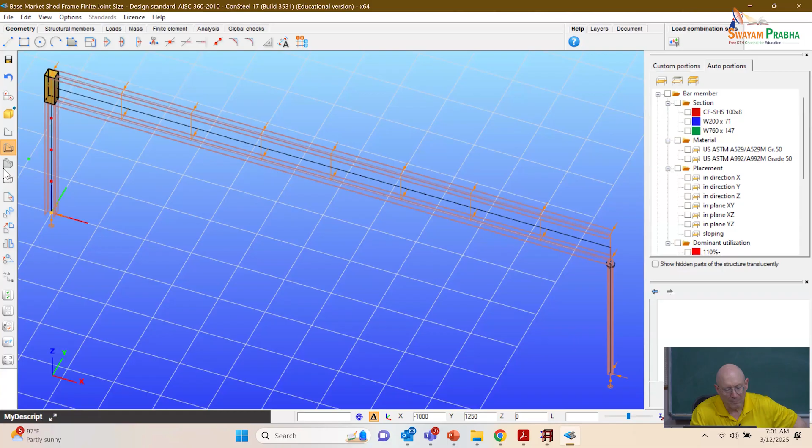I'm going to turn these off. Okay, so we've got that view of our frame here. It looks a lot like the L frame that we did before, but this is a sway frame now. We've got the out of plane bracing similar to the L frame. They are top and bottom flanges on the roof girder. We've got simply supported boundary conditions in plane but resisting twist there at the base.

And now in the market shed frame we have an HSS column here on this end that's supporting the so-called right end of the roof girder.

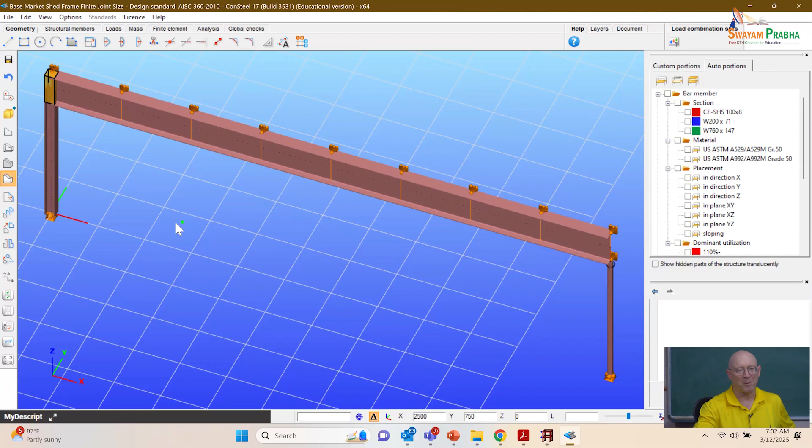Now remember when we did our model of the market shed frame yesterday, we had a pin. Now a few subtle things there at the top and bottom. The pin was basically at the location of the reference axis or centroidal axis of the roof girder in what we modeled in the analysis model I showed you yesterday, which is kind of a typical approximation that we often would use in engineering design.

So if I look at this one, let me go to that. I like that representation better. Here, kind of similar things. We've got the frame wizard model of the panel zone area there on the left. But what I've done here is in modeling the HSS column, I'm only modeling that column to the bottom of the roof girder.

And in that column, let me turn off the portions menu there, and let me pull up object property, that's good. So I'm going to select that HSS column so we can inspect the object properties there. Notice I have a release start point. That's the start, at the bottom. That's continuous, but I've got supports there that are basically pin supports at the bottom.

But at the top, I've now changed that from continuous to XX, YY, ZZ, W. That means I'm releasing all rotation continuity between the top of the HSS section and the bottom of the roof girder. Now maybe that's overdoing it a little bit. Possibly the ZZ should be continuous, and then we say, oh yeah, we're going to model the connection to the bottom of the roof girder as a pin.

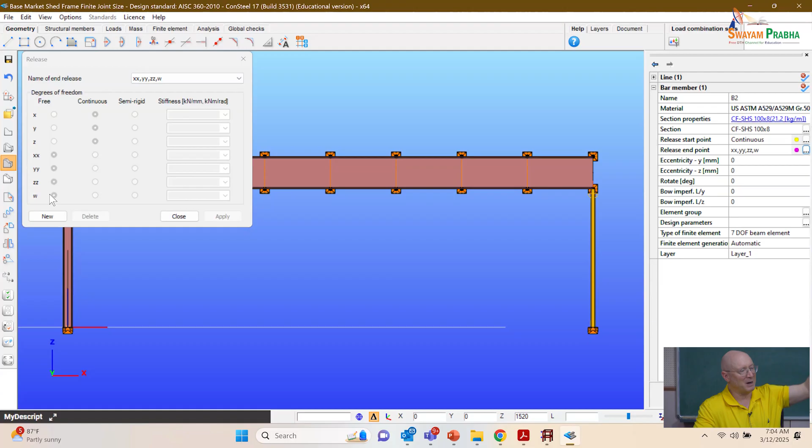Okay, now how did I get that when I modeled the frame? Similar to what we worked through when we did the L frame, but here, if I was putting in a column and I wanted that end release, then instead of continuous, I would have changed that here. Basically, I'd say I want to release those rotations and the warping continuity at the end. Now I got my column length, what reference axis do I want, how many elements, and I put the column in only with the length to the bottom of the roof girder.

Okay, so now there's another modeling feature that's available in Consteel that's very useful if you're doing something like this. At this point, if that's all I did, then Consteel would not recognize that the column is connected to the roof girder. So I've got to do something to connect it.

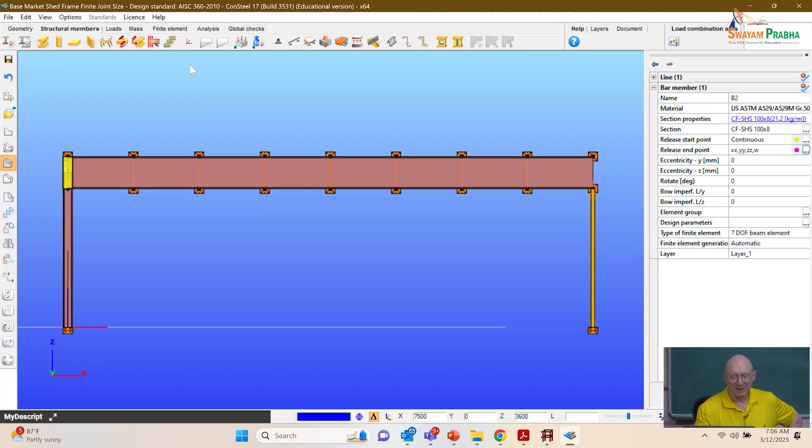If I go back to the line view, I'll highlight to show what's going on with that. So if I click right in here between that reference axis of the roof girder and the column, I think I got a point support there also. I'm going to turn that off. I've got what Consteel is calling a connection element.

How did I do that? If I come in and go to this option of a link element, I need to create a link between the reference axis of the right-hand end of my beam and the top of that HSS column.

So if I clicked on that and brought it up, I could basically say I want both of those ends to be continuous, because I'm going to model the release in the member that I'm connecting to. I just click at the reference axis of the beam, click at the top of the column. I've now got those connected by a rigid link.

Now, what's the significance of that? The results don't really change all that much by this further modeling detail, but they change some. Let's look at a three-dimensional view of the structure where we've got essentially a three-dimensional rendering of all the members, so we can understand what's going on a bit better.

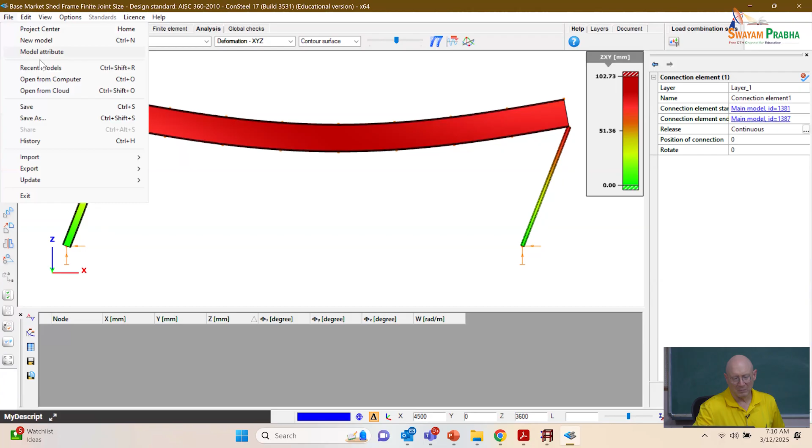Let me bring up a model that doesn't have this, and that might help you in thinking through it. So this is a model that's more like what we were working with yesterday. Let me get a front view of it. So when I analyze things here, it's working that way, right?

So what's different here, and would cause larger displacements at the top of the HSS column in the other model? So here's what I've got in this case. And if I go to the other model, get that out of the way, so now we've got this. Do you see it?

You want me to just tell you? Load is causing an extra moment because it's such a... Okay, all right. Like a P-delta moment? Yeah, yeah. So notice by doing this, now my leaning column, this HSS column, is shorter, right?

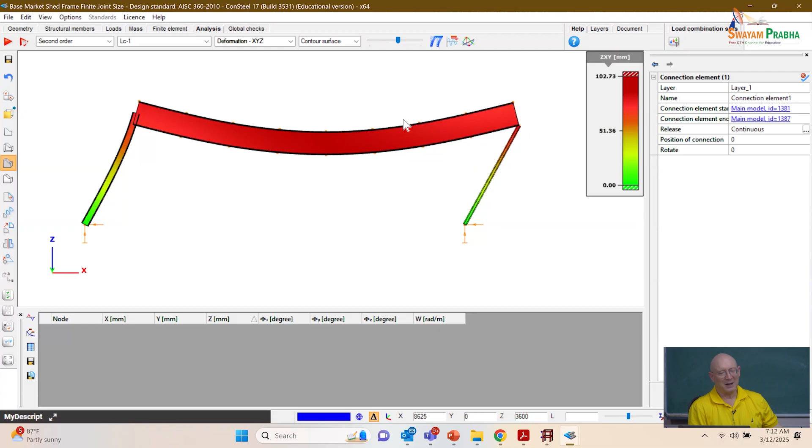The shorter I make that column with the same delta, the bigger the P-large-delta effect. Same delta, shorter length, bigger P-delta effect, right? So that's coming in. Now what's the other thing? Look at what's happening in terms of the lateral deflection of the centerline of the roof girder versus the lateral deflection at the bottom of the roof girder.

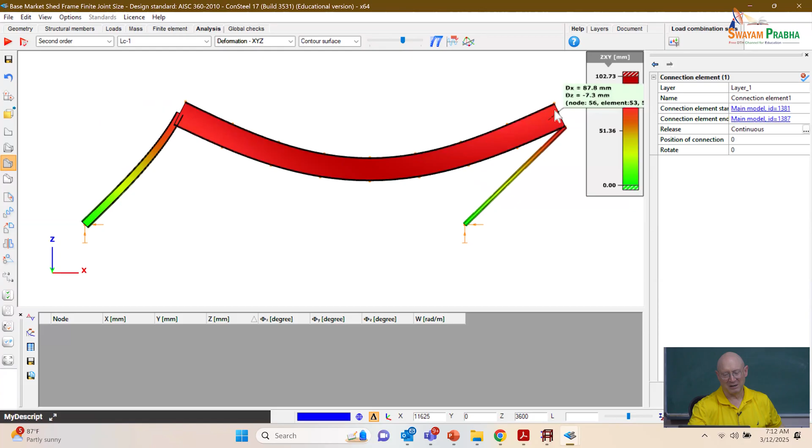If I'm connected to the bottom of the roof girder here, it's deflecting further, because I've got a major axis bending rotation that's counterclockwise in the roof girder. If I'm connecting to the bottom, then that point's displaced laterally further than the reference axis. So both of those things are giving larger displacement at the top of the HSS column than that other model. You might say, does that make a big difference? It doesn't make too big of a difference, but it is a difference.

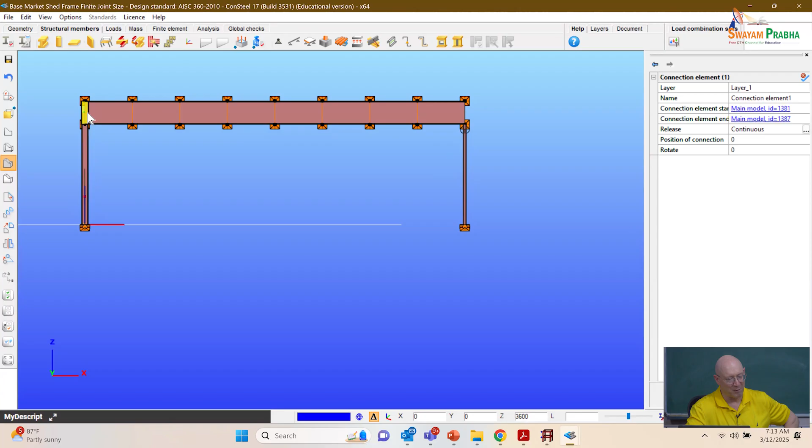Now, another aspect here - Consteel, if we went to its design capabilities, would handle things this way once we've modeled that joint. So if I go back here, I'm modeling this panel zone with the joint wizard. In sizing the wide flange column, or checking it here on the left, it would basically say that member stops at the bottom of the girder - I'm not going to model member length all the way to that center line. We've got a big beam adjacent to the center line over a finite length there of the panel zone.

So that's really a more realistic assessment in terms of sizing the column. I noticed in the Indian IS 800 code, it basically said you should always design the member center line to center line. But here, this would be an argument that in some contexts it would be more appropriate to consider that member goes from the base plate to the bottom of the roof girder. Same thing for the HSS section over here - it's a little bit shorter.

So that may - here we're just modeling in this representation, we're just modeling the behavior. That's working just as a pin and strut - we're not generating any moment in that HSS section. Got a nice, perfect spherical bearing connecting the top of the column to the bottom of the roof girder.

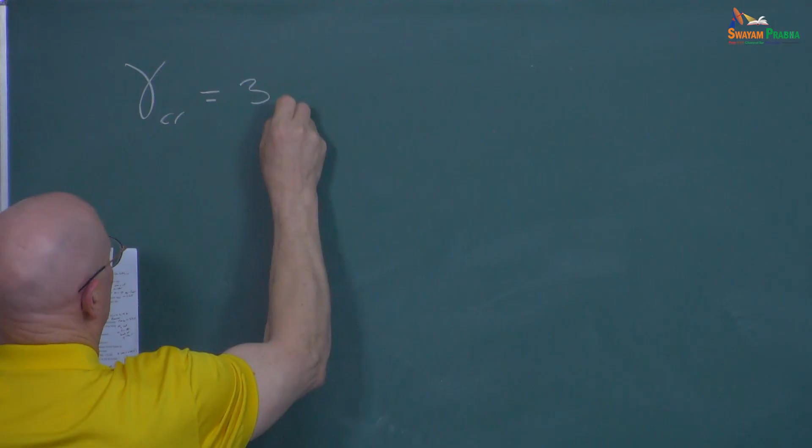And if we do the checks here on this, we basically find that things are more than adequate. So here's where I want to use the board a little bit. Our gamma critical for this case is 3.74. So that's the elastic buckling result. Let's actually look at that.

So if I go to buckling analysis - oh, what's that? Oh, the HSS section is buckling. Okay, that's important for the HSS section. It's not important for the frame design though. If I set this to a perspective mode, let's look at the second mode. Oh, it's buckling out of plane - it's a square HSS section, so yeah.

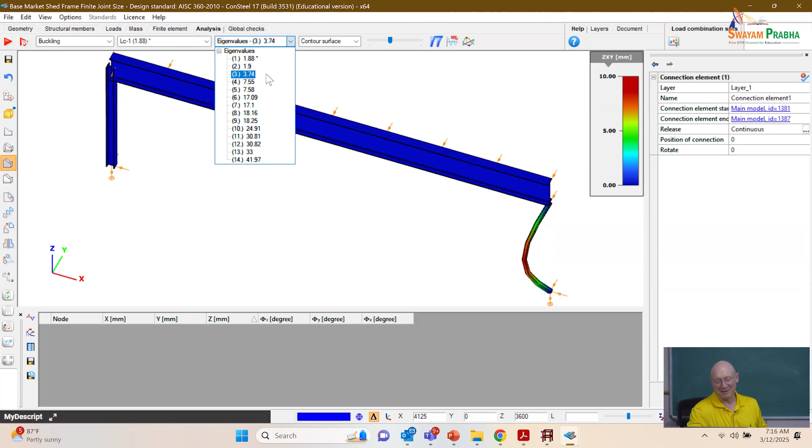Oh, this is the one I want for the frame. It's a front view here. Oops, I don't want that buckling mode. So 3.74 - this is my buckling mode for this case. Clearly that's a side sway buckling mode.

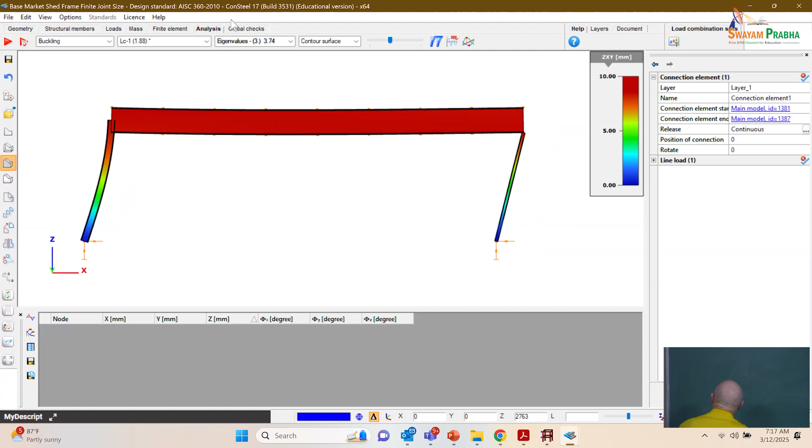I'll just say very broadly, so the axial force in the HSS section here is equal to 370 kilonewtons, and the moment in the W section at the top - this is at the bottom of the girder - is 111 kilonewton meters.

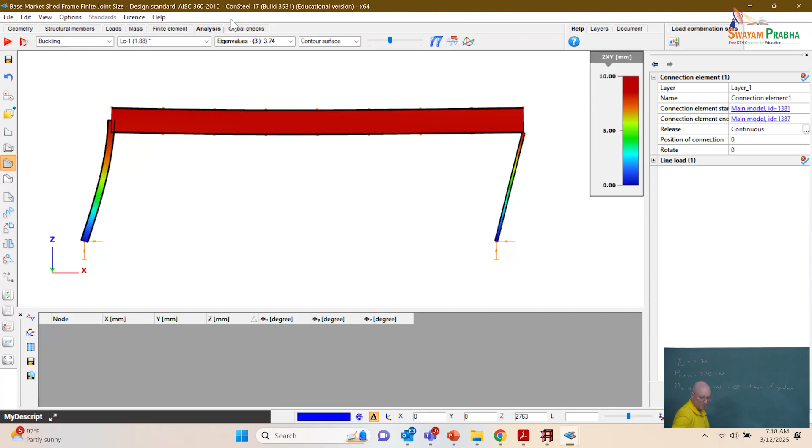Again, if we look at second order analysis results here for this, we can go to internal forces and go to MX. So what I'm referring to here is, clearly the moment is dominated a lot by moment bending - the big moments are actually in the roof girder. I can turn on the portion manager and use the automatic portions here to basically say I'm not interested in the moment in the roof girder - let me just look at what's going on in the column and in the HSS section.

Well, no, there's no bending in the HSS section here - it's pin-pin. And at the top of, or the bottom of the roof girder, there's your 111.

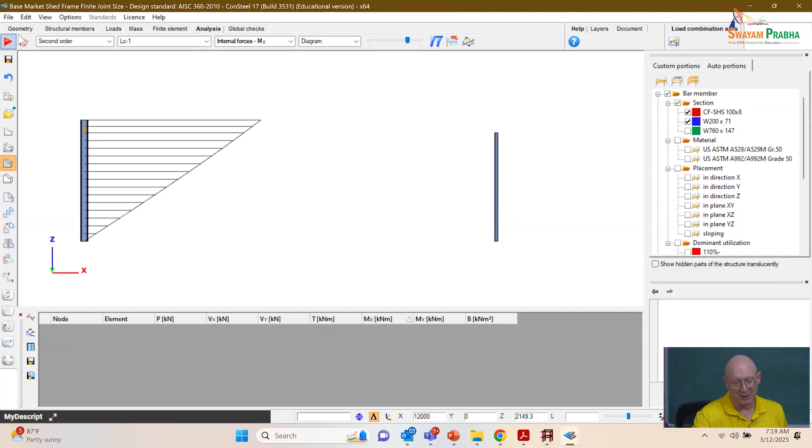All right, so that's a model that often we would use for design. But now let's look at another representation where it's a continuous market shed frame with finite joint size. So if you pull that one up - okay, so here's the frame, looks pretty similar to what we just did.

If I look at the front view of it, there's my front view, but I've now changed this. I basically went in and said, on this column, we'll turn off the portion view, and I've now changed the release endpoint to continuous. So I'm saying, I've got an end plate connection of that HSS section to the bottom of the girder - I think maybe that's closer to a continuous detail than a pinned one. So that's what I'm thinking for my idealization.

Let's run the analysis. So if you run the analysis that we're set up here, clearly that HSS section - let's do second order.

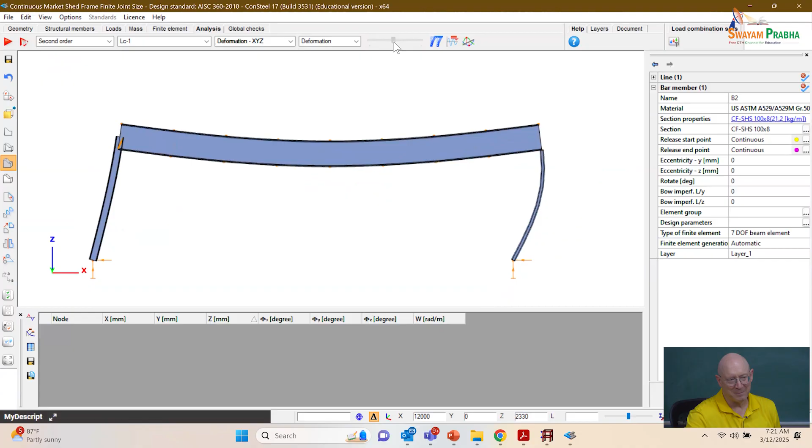So if we look at the deflections here, that HSS section is kind of getting beat up by the frame a bit, right? It needs to bend with the major axis bending rotation at the end of the roof girder.

So it's bending way out there. And if we assess what we've got with this by going to click on the deformation XYZ, go down to internal forces, and we'll plot the bending moment MX.

Let me turn the portion manager back on, so view portion manager, and we'll just do the HSS column and the other column. So now if we scale those moment diagrams,

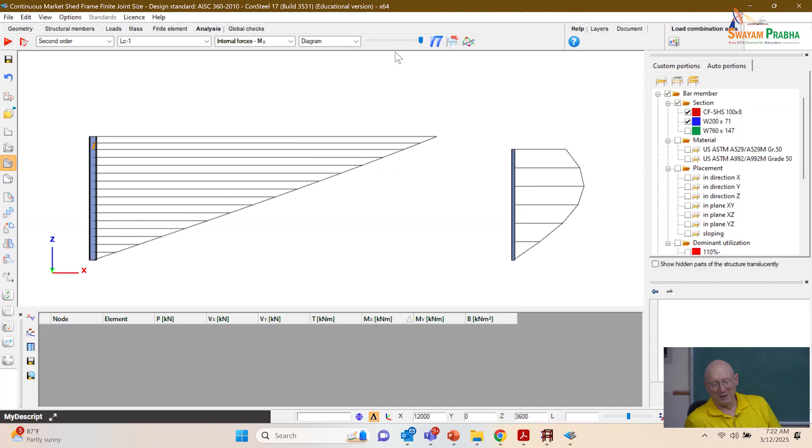clearly that HSS column has got a lot of P-small delta effect going on, right? Even though this is a sway frame. So this is what I was mentioning yesterday when I said, okay, well, sometimes you can add material or you can add continuity and you can make a structure weaker.

So let's look at what we've got for the buckling load on this. So we'll go back to the full frame, and we'll tone down the exaggerated displacement there a bit. So it's buckling like so. Remember, the buckling load we had with the previous model was 3.74.

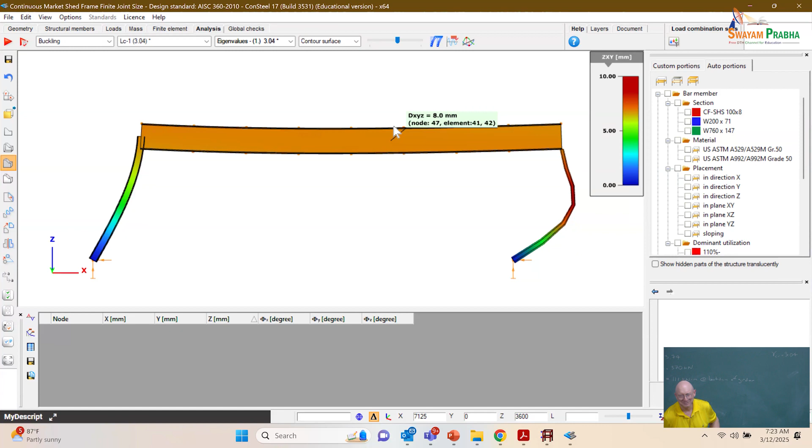This is now gamma critical equal to, what, 3.04? What happened? We added continuity, the buckling load went down. Or at least the buckling mode involving side sway went down. We had a lower buckling mode on the HSS section before.

So is this side sway buckling, or is it non-sway buckling? Or is it neither?

We've basically got a problem, and this is what LeMessurier, when he was doing that inequality I showed you with the calculation of the K factor, he would put a lower limit on the K factor because if he was looking at frames like this, that stiffness-based model that we use, that's just a side sway stiffness model, stops working so well when we get to a frame that's like this.

Let's be careful. Yeah, so it's kind of a hybrid buckling mode involving non-sway buckling of the HSS column, which has some partial restraint of side sway from the rest of the frame, but the rest of the frame is undergoing some sideways sway in this buckling mode.

Right? And so the first thing I'd like to ask here is a question. I didn't write out a handout for this, but how many elements do we need to make sure we've got a good model of this HSS column?

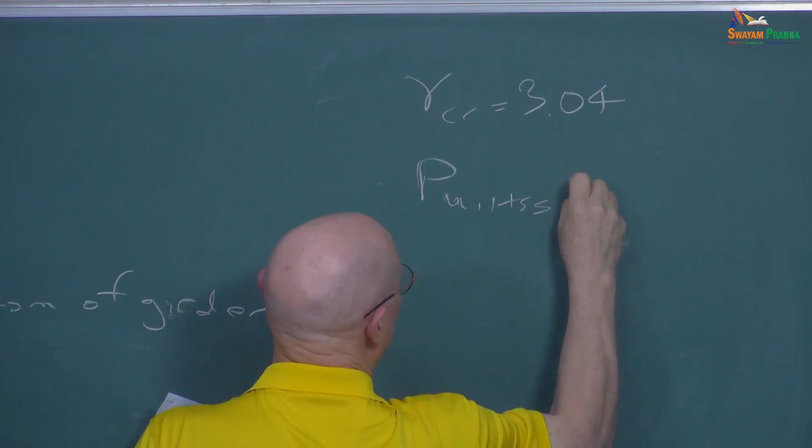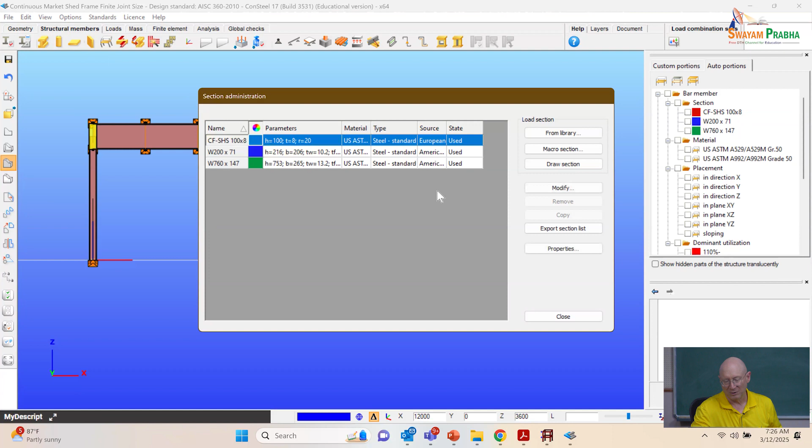And if we need to look up, well, what's the moment of inertia of that HSS section that we use? We can come back here to the section administration. We can click on our HSS section here, modify. Yeah, moment of inertia is 3.616 times 10 to the 6th millimeters to the 4th.

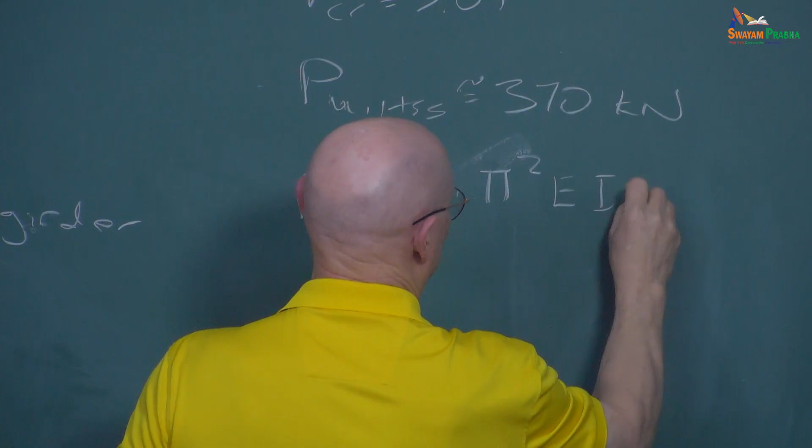And so if we do a PEL there for that buckling of the HSS section in plane, so I'll call that X. That's equal to pi squared EI of the HSS divided by that L squared, which was, I think, I'll do L minus the depth d over 2 of the roof girder squared. So if I do that, I get 688 kilonewtons for that.

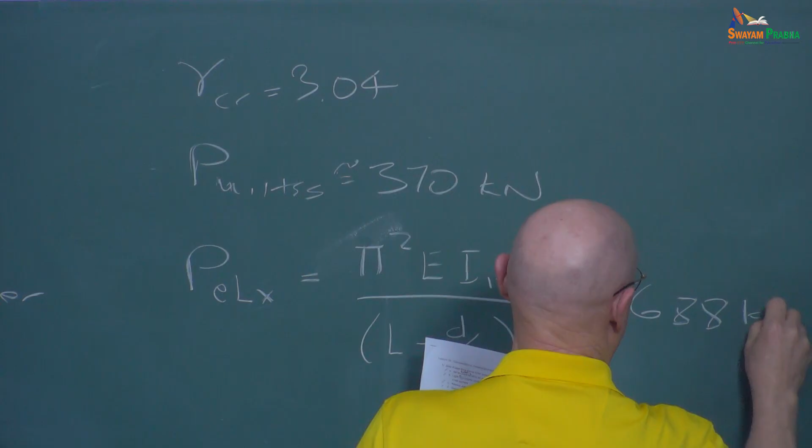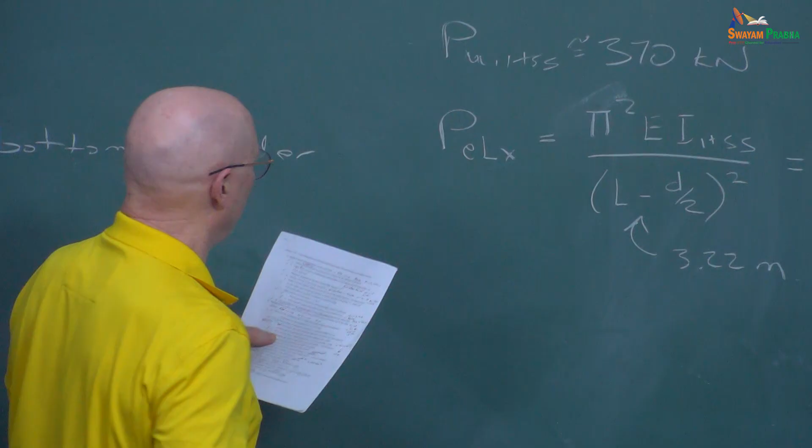Okay, so for this we get, it's 3.6 meters from base to the center line of the roof girder. So this is 3.22 meters here for L minus D over 2. And so the PU over PE script L here is 0.54.

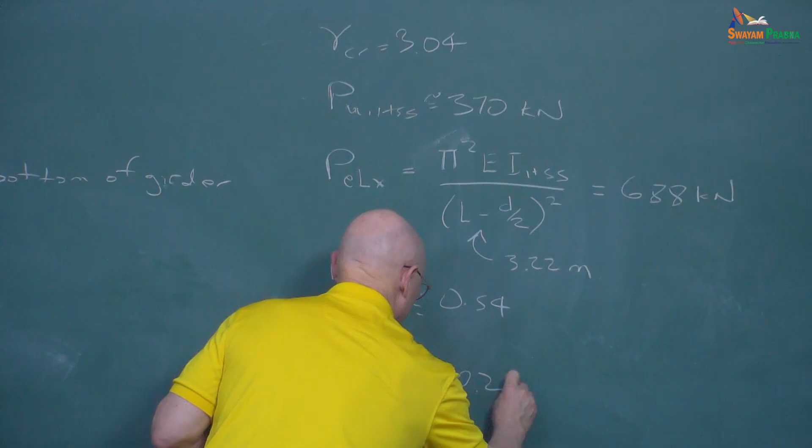How many elements do you need if you want PU over PE script L less or equal to 0.02? How many elements?

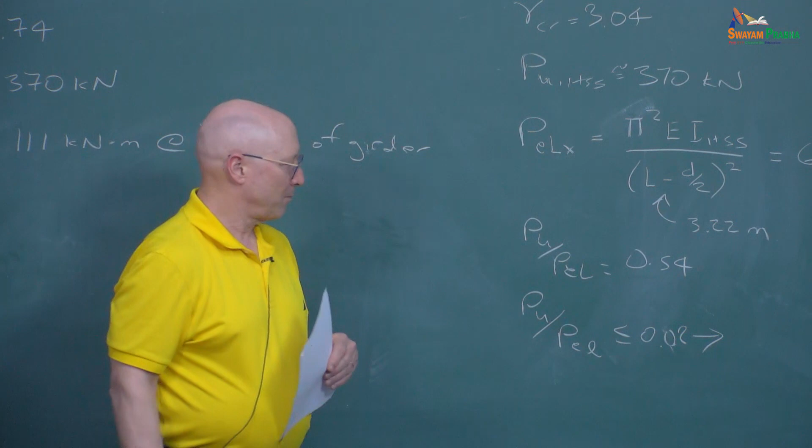So that's kind of the basic rule, applying the basic rule of thumb that I've been discussing there. And if we check that column, what did we use?

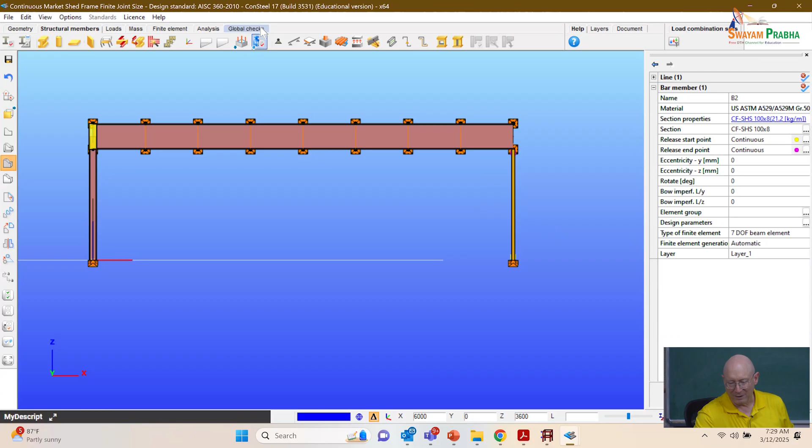Let's see, I have automatic... if we look here, this basically shows it: 1, 2, 3, 4, 5, 6. That's what you'll see Consteel use - often 6 elements between unbraced lengths or between brace points.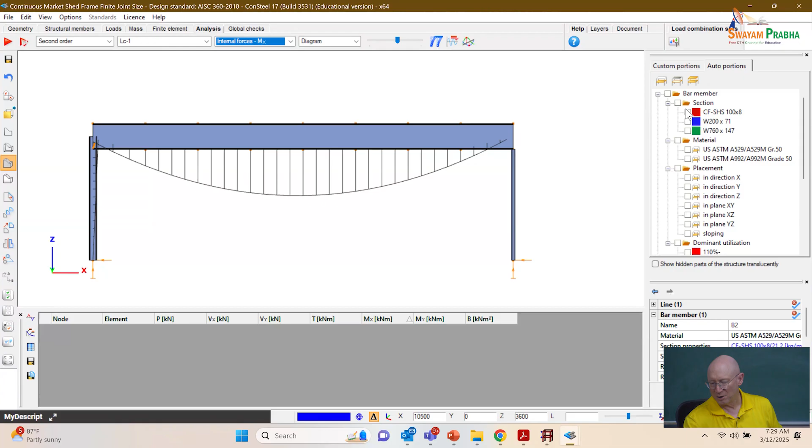Okay, so that looks like that's going to work pretty good. Without doing all that, you could simply say, let's look at the moment diagram we get from the analysis - does it look like a reasonable representation? We're doing a bilinear representation of the moment diagram. Is that a pretty good fit to you? It looks pretty good. It's piecewise linear, but it looks like a pretty good fit to what is really happening.

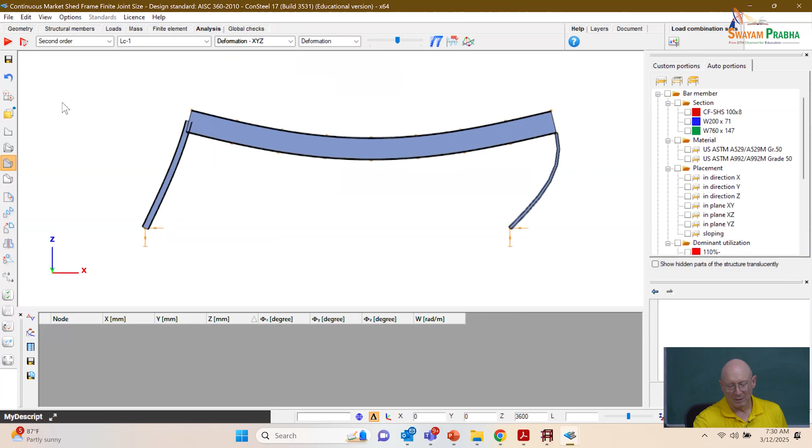All right, so the academic question of the day: if we come here, and let's come back to where we're drawing the deflections, we can look at it with a perspective view if you wish.

Should the continuity help or hurt the HSS column here? So we can see already that the gamma critical was decreased. What's the buckling mode? We can see there's a lot of non-sway, or basically non-sway bending, we'll call it, in the HSS section.

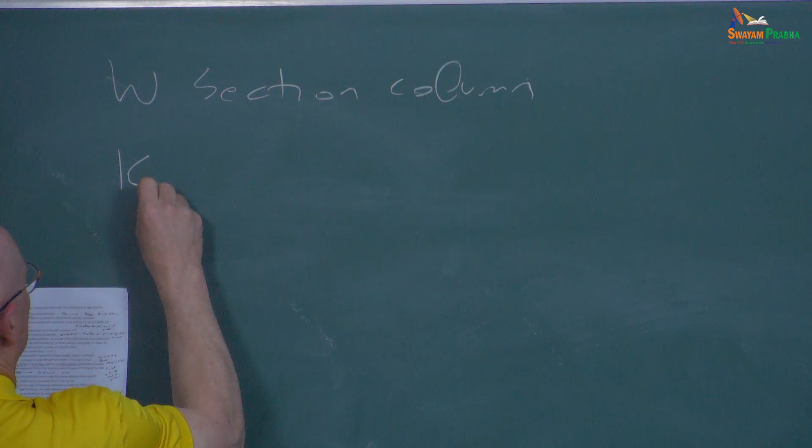Now if we do a check of the wide flange section there, without writing all the numbers out, we'll get for the wide flange column - the left-hand column - the effective length factor Kx is 3.29. This is based on L equals 3.6.

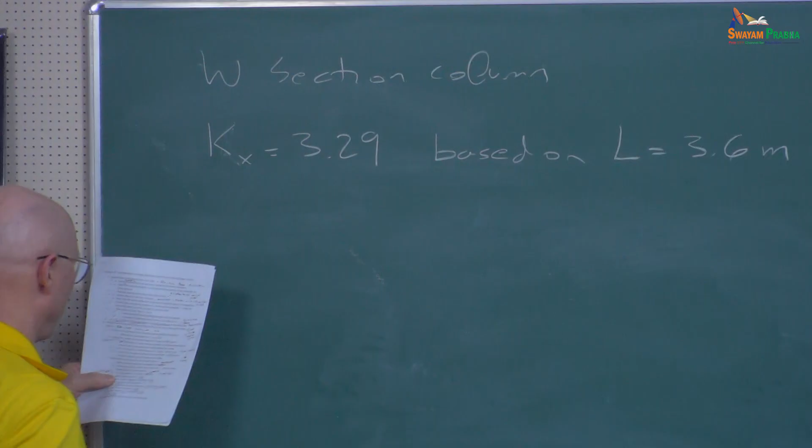You could say, why didn't we use it to the bottom of the column? Okay, if we did, we'd still get the same KL, because the P critical X here is the same number - that's the fundamental value, that's 1081 kilonewtons.

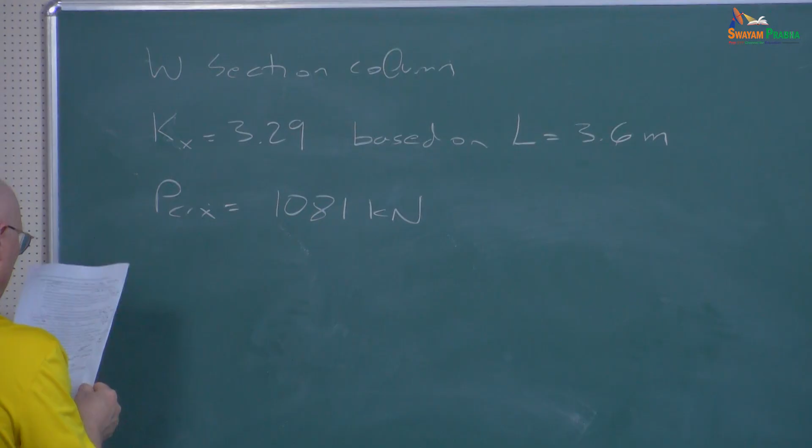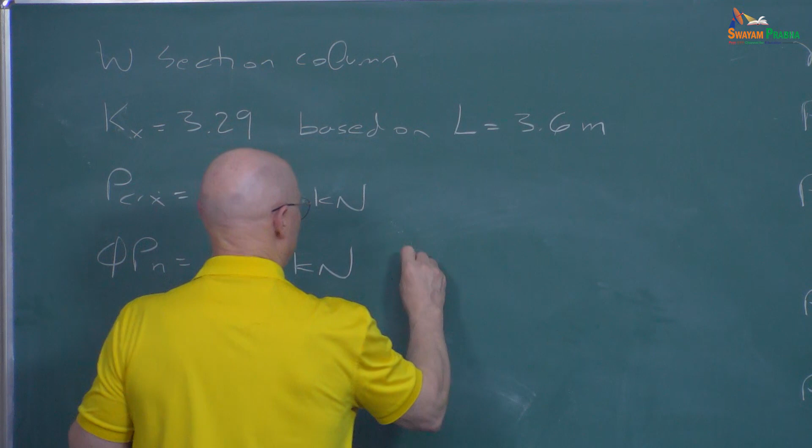And so if we use this with the AISC column curve formula, then we get a phi Pn equal to 838 kilonewtons, and a Pu over phi Pn equal to 0.418.

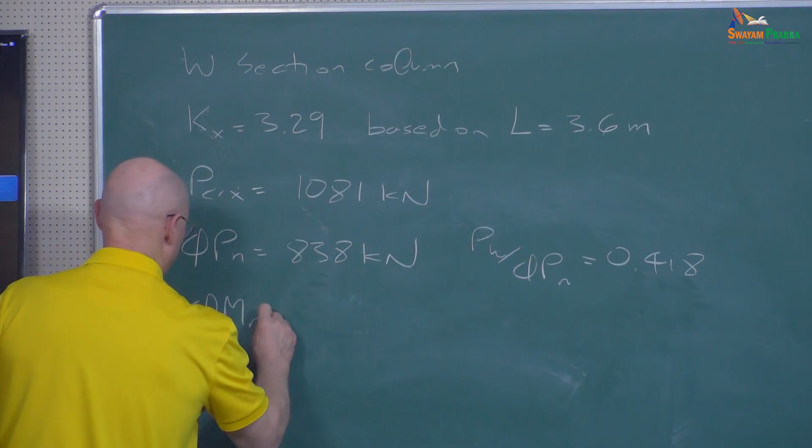The moment at the top, so for the moment in the wide flange section, phi Mn - if we work it through everything by AISC standard, you can get to Mp. You've got a sufficiently short unbraced length. The moment gradient from 0 at the bottom to maximum at the top helps. And so phi Mp here is 249 kilonewton meters.

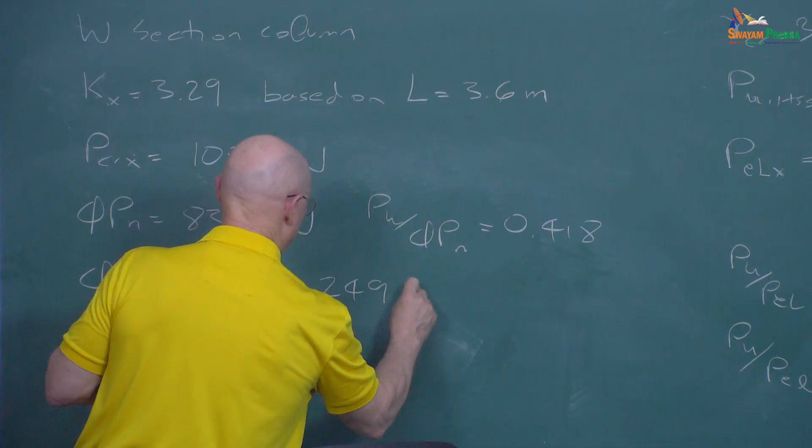And so Mu over phi Mn is equal to 0.462.

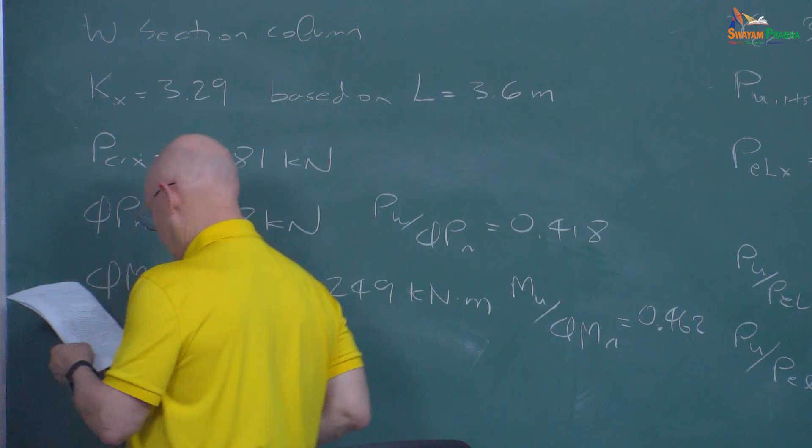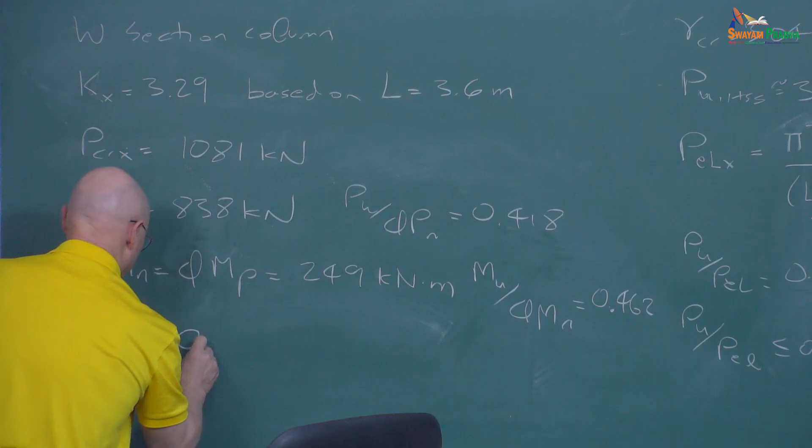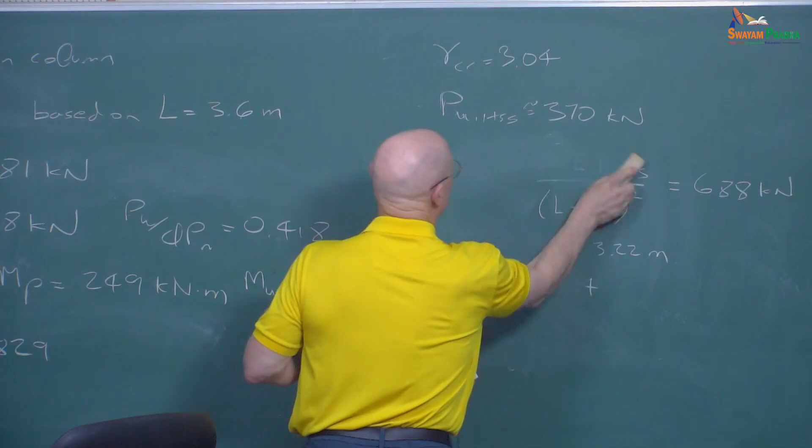And so the unity check - the beam column interaction from these, it's the bilinear equation in the AISC provisions - gives us 0.829 for the wide flange column. And so that checks, even though it's a little bit larger than what we would have had if we designed it based on the simpler model we were working with yesterday, where we didn't have the finite joint size considered in the solution.

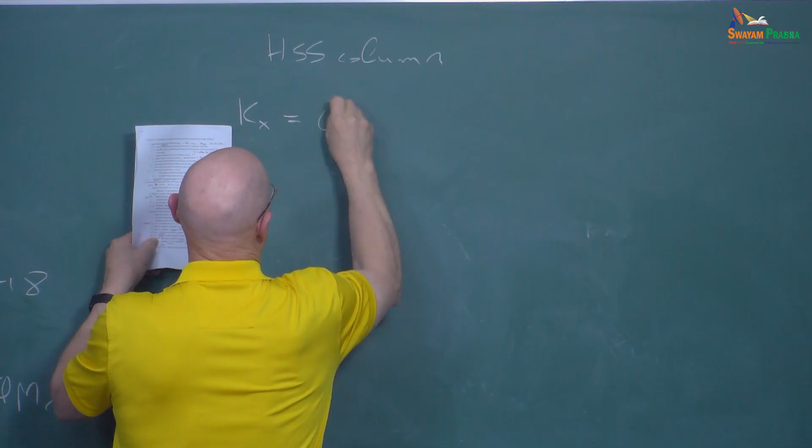But now the HSS column - we get a Kx, if we back-solve for Kx, we get 0.788, and I calculated that one based on L equal to 3.22 meters, so the length to the bottom of the girder.

And so here from the solution, for our loading that we have, the P critical X is 1,108 kilonewtons. Phi Pn, if we do the column strength by the AISC column curve on the HSS section, is 0.618.

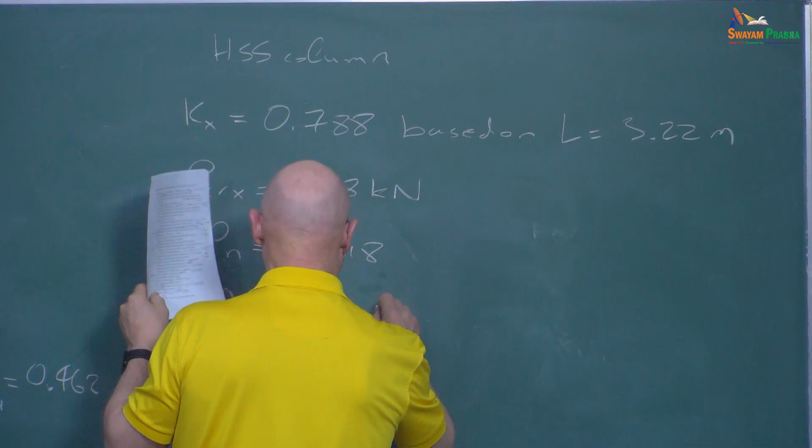Phi Mn - the HSS section here has compact wall elements, and so we get phi Mn equals phi Mp. So that's equal to 31.2. It's not very big, so the plastic moment you can see is relatively small compared to what we had for the wide flange column.

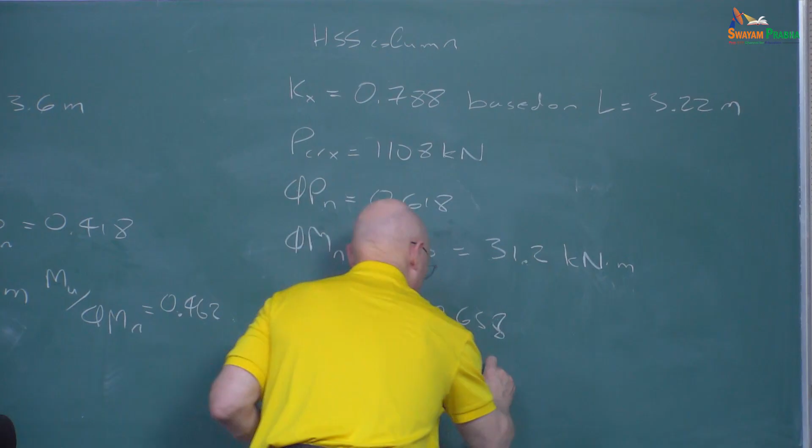And Mu over phi Mn here is 0.658. And the unity check, so here this would be by AISC, would be: unity check equals 0.618 plus 8 over 9 times 0.658. So we get 1.203.

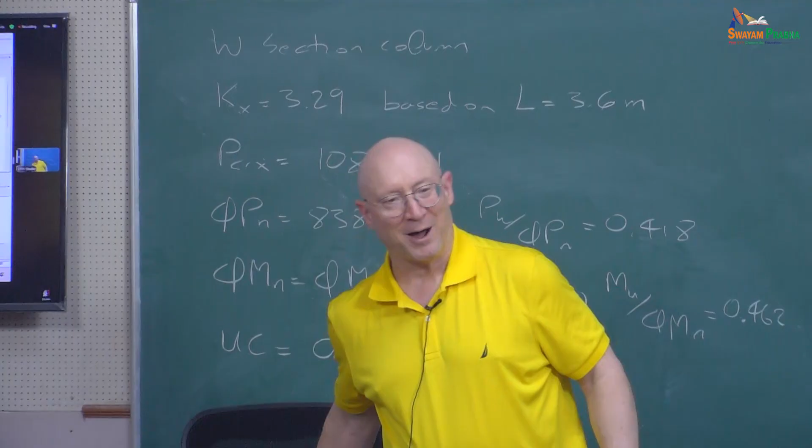All right, so we had a column that was perfectly good with the other idealization, and now it's failing by 1.2. Okay, as a practicing engineer, what do we do about this?

Again, as I said yesterday, this is the problem where Balint said, 'Oh God, if you're going to do that.' But this sort of situation does come up in practice in various ways, where you have something - usually something relatively small - that's starting to get beat around by the rest of the structure.

So again, in structural stability, we don't necessarily increase strength when we increase continuity or when we increase material. Change the idealization - I think probably the detail at the top of the column is probably closer to fixity than actual perfect pin, right?

So it may be hard to argue for that, although many engineers have said, 'Oh come on, I'm just going to design it as a pin and strut, forget about it.'

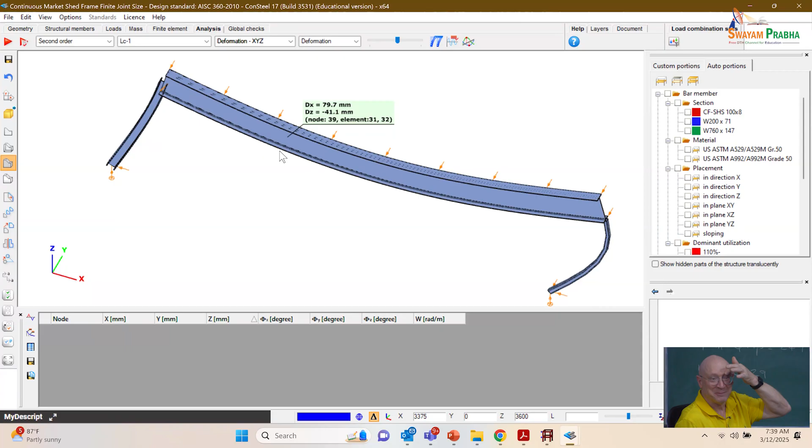Sometimes you might get away with making the HSS section smaller, and the unity check reduces if you can get it to work.

But then there's another approach. This actually shows up in how the Indian standard spoke very directly about it. We don't have that kind of guidance in the American standard. So that's like, well, wait a minute, do you think the column base is really a perfect pin?

So let's say, well, no, we don't. So let's go to a third model where we're going to put in a rotational spring to represent some incidental restraint that we would get from a simple column base detail.

As I understand it, in the Indian code, it doesn't tell you how to model base stiffness, but it makes a comment that you should use 10% of the column stiffness.

And we have a rule that's kind of doing that when we do buckling calculations with the alignment chart in the AISC provisions.

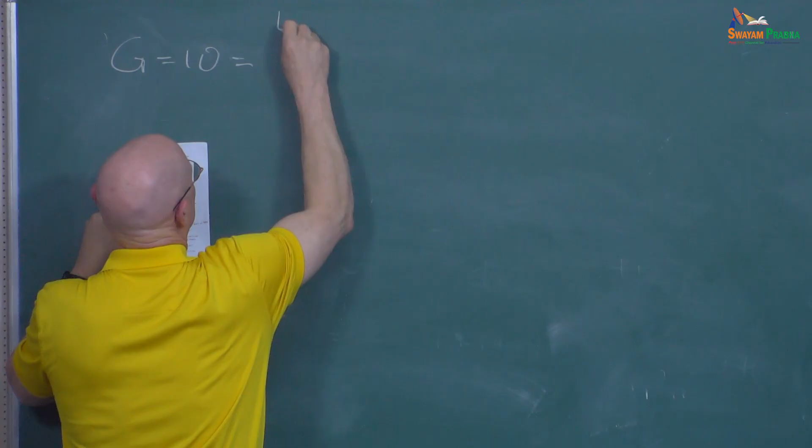With the alignment chart, we basically say, if you have a pinned detail, use G equals 10, which is your EI over L of the column divided by the EI over L of the beam. Well, there is no beam, but we're saying it's a rotational spring equivalent at the base. So that's kind of the same thing as what the Indian code is saying.

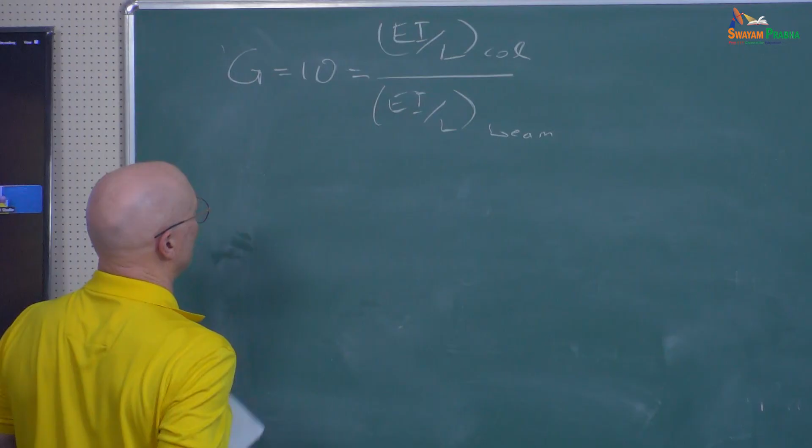Now with sidesway, the column stiffness associated with this sidesway mode would be 6 EI over L. So we're going to say we should use a rotational spring. I'll call it little k, a k rotation, equal to 1/10 of 6 EI over L. So that's 0.6 EI over L. Okay?

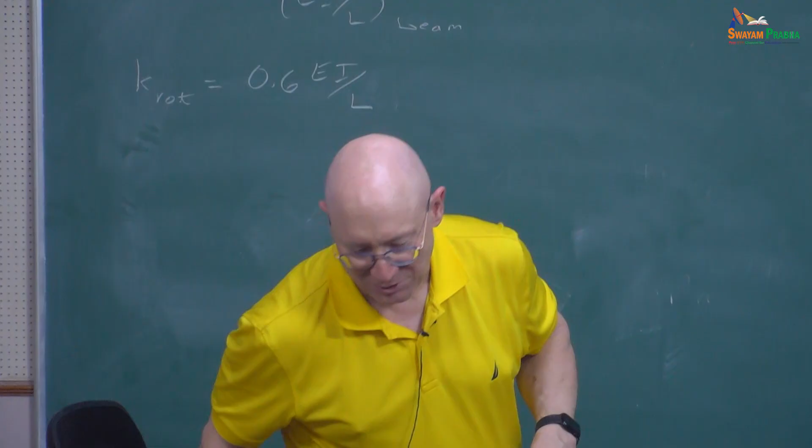So this is kind of a silly little way of saying, let's count on some restraint. If you start modeling more directly what's really going on in a base detail, you typically find that this is probably a very small number at low load, but then at some point the simple base detail starts rotating a lot. It's a nonlinear response, but we're trying to do this without getting into modeling a nonlinear base response on the frame.

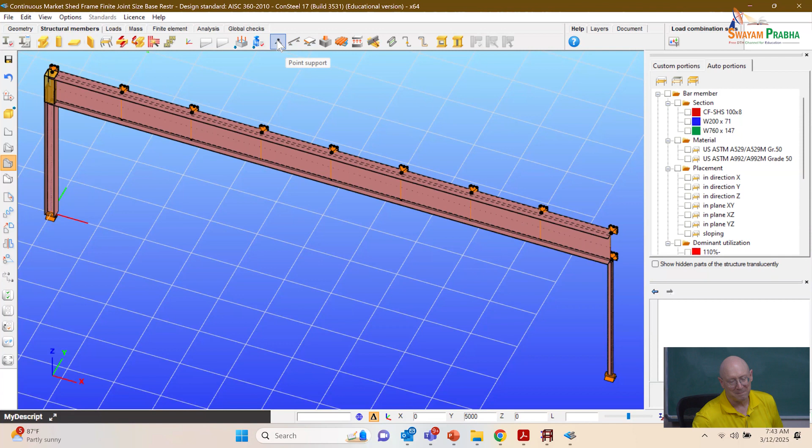Well, how do we do this in Consteel? If we come to structural members and go into the point support again, under the point support we can go to an option. I've actually created an option here for the wide flange section and for the HSS section. If I click on that to understand what it is and pull it up, I called it XYZ, ZZ, RY, W section.

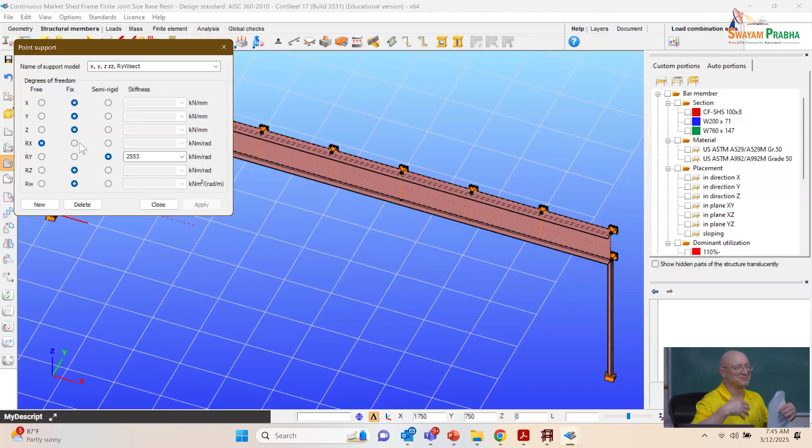I've got XYZ fixed, rotation X - that's the horizontal axis, so out of plane - I left that as free. But then for RY, rotation about the global y-axis, I calculated the 6 EI over L of the column and put that in here. So now my base model has this fake elastic spring that's kind of an accepted kludge of putting in some restraint effect for the base.

If we go inspect this, I'll turn off the portions dialog and select the column. Is that what I want to do? No, I want to actually select the base detail there, and I can see, yeah, there it is. That's for the HSS section. If I click on that one, I can see the HSS section 6 EI over L is much smaller because that's a much smaller section.

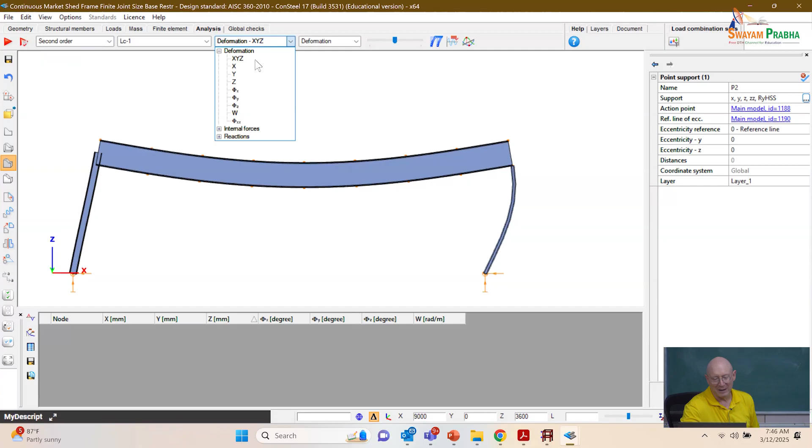So if we use that as our idealization for the wide flange section column and for the HSS column, let's do our analysis, go to second order, and look at our internal moments. Again, the girder moment kind of dominates everything, so we need to go back and turn on our portion manager, and let's just focus in on the columns.

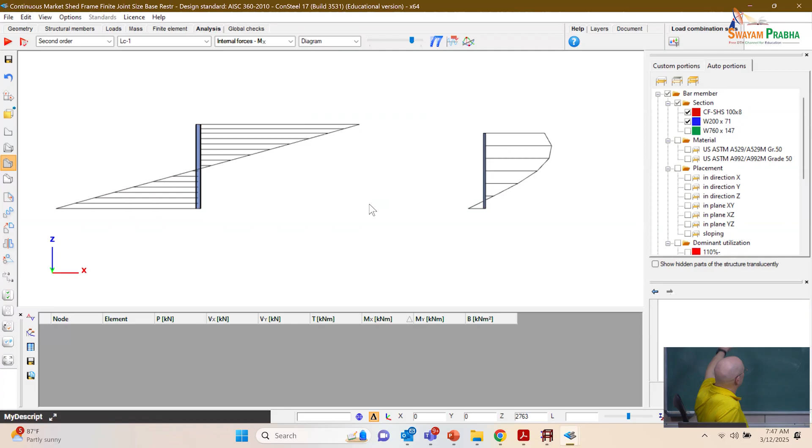I've got almost full reverse curvature bending in the wide flange section here now. That's not just because of the side sway, notice there's more going on here. A big part of the moment in the wide flange section is the gravity moment coming in from the roof girder, combined with the lateral moment from the side sway. We end up getting a moment diagram that's almost full reverse curvature bending, even though that's a very flexible connection model at the base. And I'm getting a little bit of help in the HSS section.

So now I need a different color chalk. We had 3.04 for the side sway buckling. Let's look at what we got here with this buckling. Okay, it's gone up to 3.8. And still, if I put everything in, it's kind of a side sway mode with a big influence of non-sway buckling going on in the HSS. But 3.8 is slightly higher than the 3.74 we started with when we just had a basic pin-pin model of the HSS, right?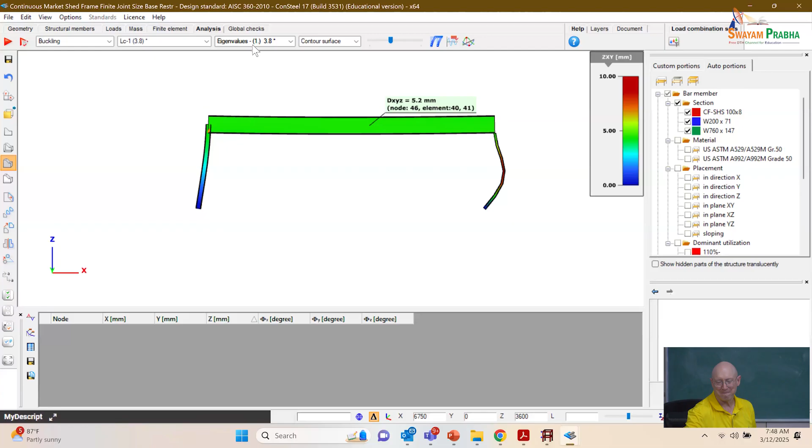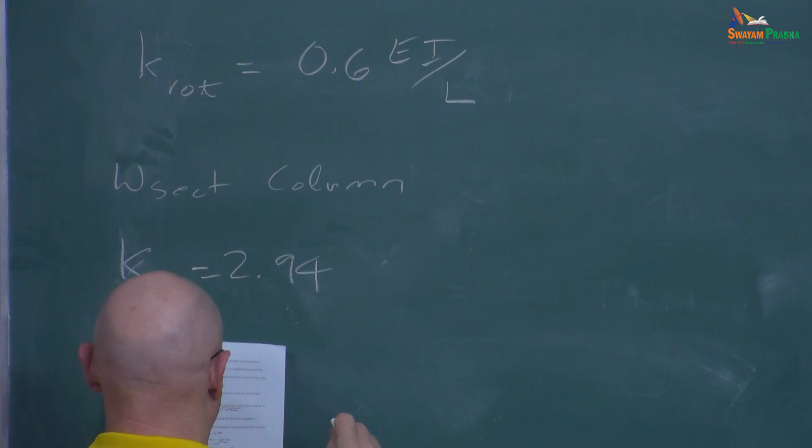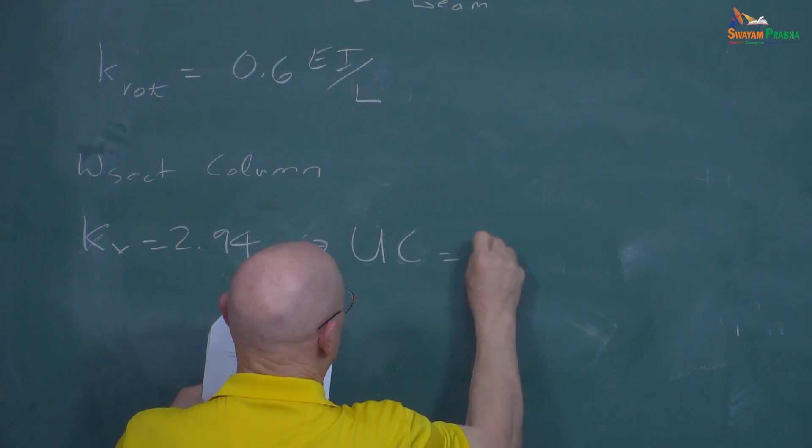And so based on that, if we're looking at the wide flange section column, the W section, I end up now with a KX of 2.94, which based on 3.6 length gets me to a unity check, if I put it all together, of 0.46. The moment went way down, so the unity check on the wide flange column is much lower now.

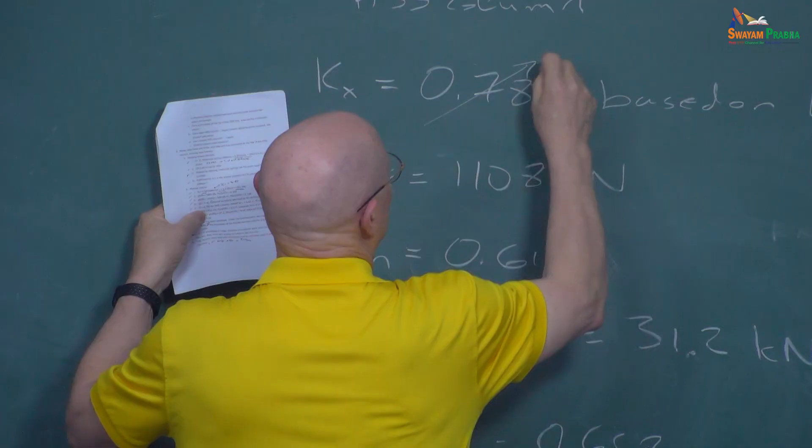All right, if we look at what we're getting from these things, if I just change the numbers here on the HSS column where we're having the trouble, this becomes 0.707 now from the buckling analysis. This number, which is the fundamental number for the column buckling and for getting the column strength, becomes 1376.

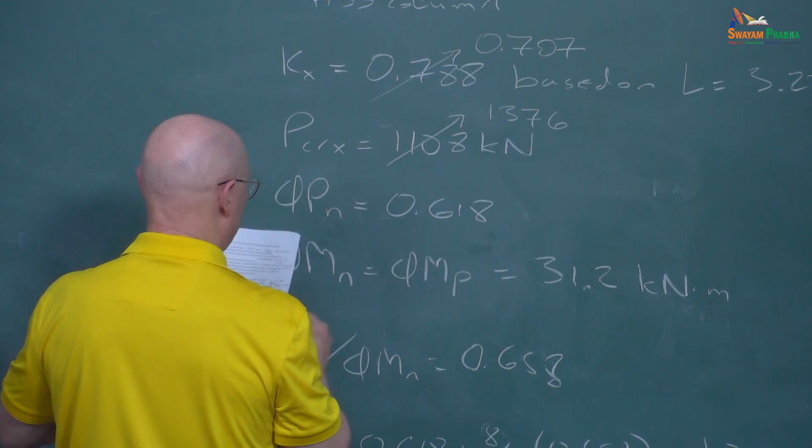My phi Pn is 0.618, that's not right. Phi Pn, I wrote down the ratio there. Phi Pn was 590 kilonewtons before, and Pu over phi Pn was 0.618.

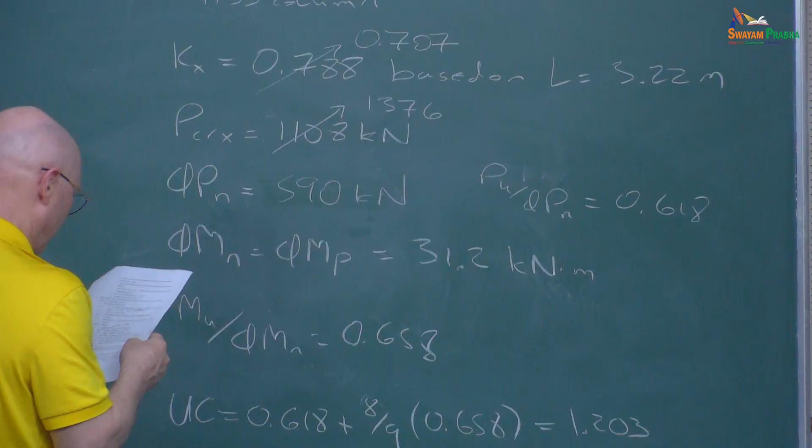So now with this change, where we've got this simplistic modeling of the base conditions, this becomes 632. This becomes 0.577. And the phi Mn is still phi Mp, but the moment decreased a bit. So Mu over phi Mn reduces to 0.54.

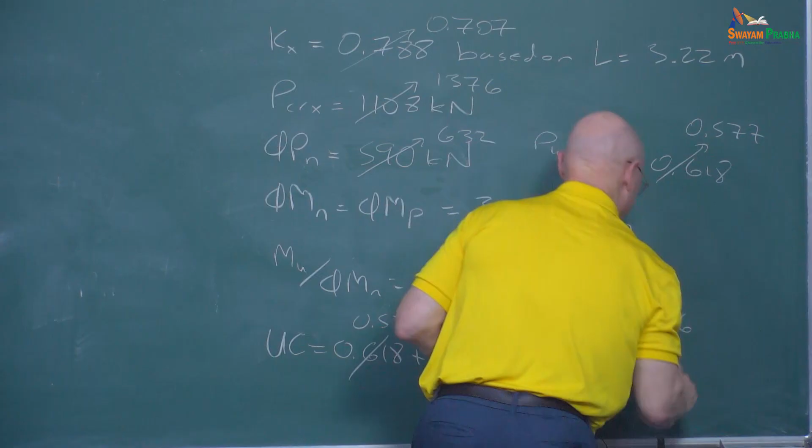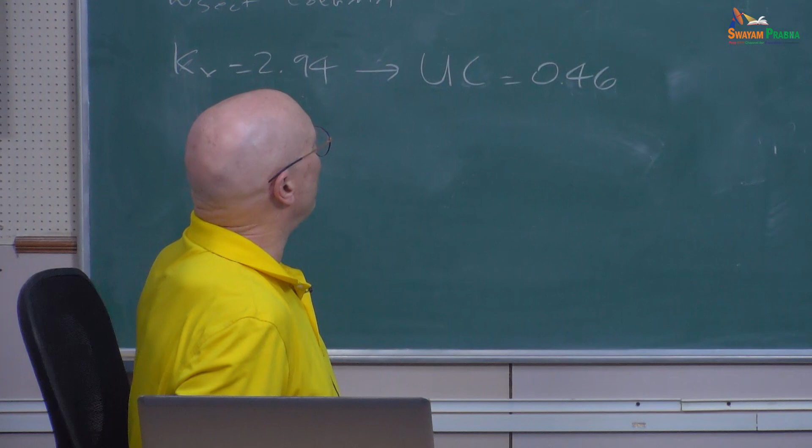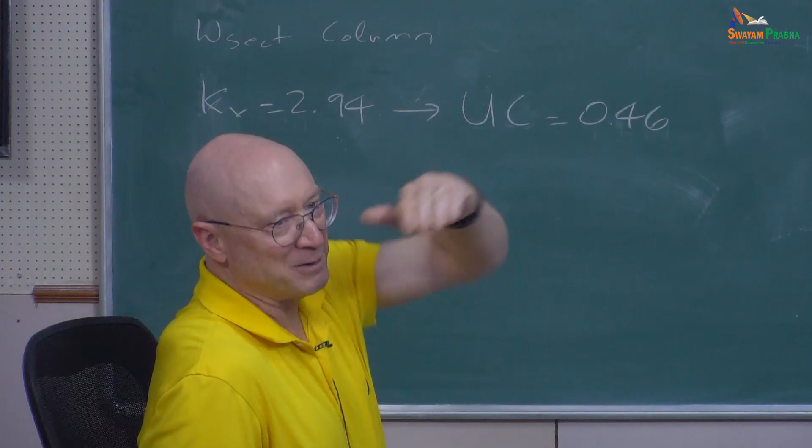So at this point, if you're willing to buy that, this is a reasonable elastic estimate. If you really dig into studying base restraint, you find at low load levels this is a very conservative, very low number. It's just that if you get to a very high moment demand on the base, it's nonlinear, so this is kind of trying to give a very simplistic secant approximation for the base rotational stiffness.

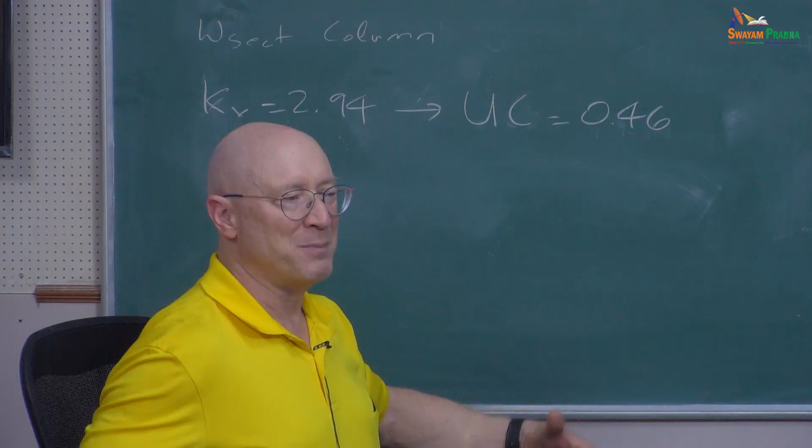So given this, you could probably at this point just say, okay, maybe we'll just make the wall of that HSS section a little bit thicker, and then it's going to work. If we make it a bigger section, we're probably still going to have a little bit of trouble, because if we make it bigger, we're going to attract more moment. So, kind of an interesting case there that's useful to think about.

For those of you in practice, have you encountered cases where you're basically trying to design something, you make it bigger, and say, wait a minute, now I've got a bigger problem? It happens sometimes. So this is kind of a simple illustration of this.

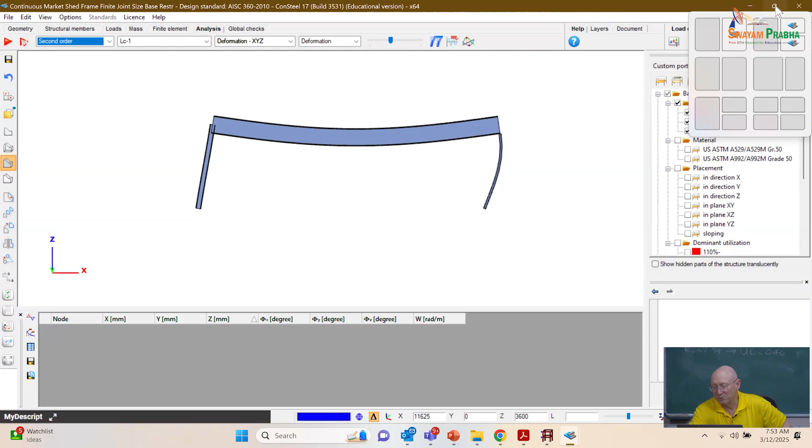So here, if we look at the center line of the roof girder for reference, it's drifting under our factored loading by 54.8 millimeters. Okay, here this is with the base restraint. Without the base restraint, let's see what we've got. So I think this is the one without the base restraint, continuous. So we have 54.8, it was 79.7 here.

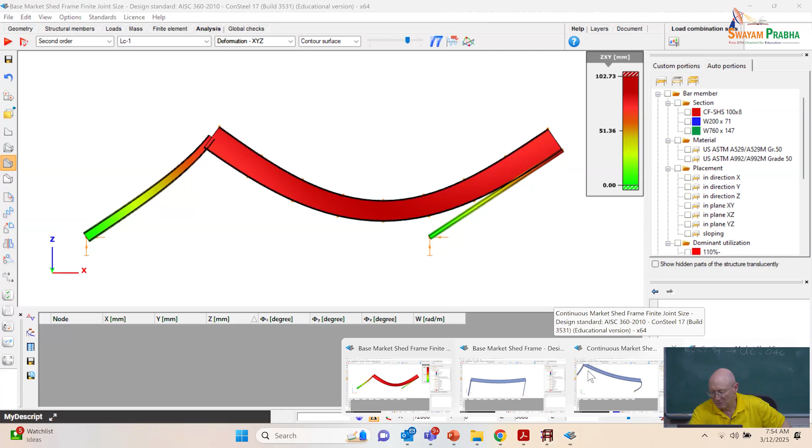And if we go back to our simpler model that we started with, where we just say we're going to model that HSS column as a pinned strut, I've got to check the deformation. Okay, 87.8 there. So let's see, did it decrease with the second one or no? 87.8 here, and then when we went continuous, no, 87. Okay, so it did. By making it continuous, that makes sense—the continuity did decrease the lateral displacement a little bit, right?